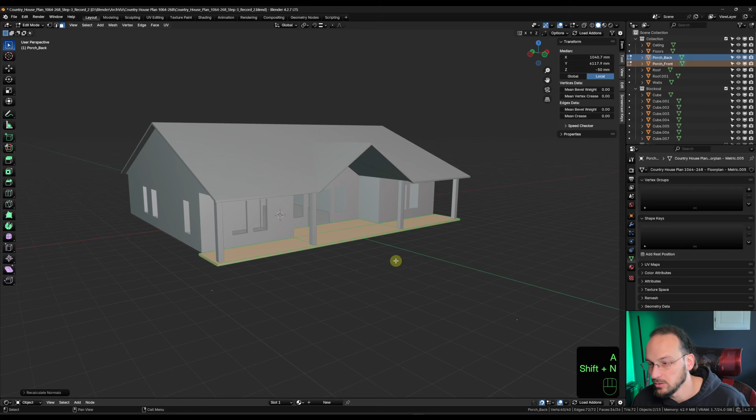And I'm also going to select the walls back in object mode. Vertex select. I'm going to go into left view for that, X-ray mode, select everything on the bottom. And I'm going to snap it onto the porch. So E, snap it to the porch. And that way everything is a little thinner. We have a nice slab on the porches. It'll look a little better.

All right, next I want to get some organization in here. I'm going to call it my collection house, a little sloppy there. I'm going to make a new one in there and call it roof. And I'm going to put my roof parts into that collection. And I'm also going to call this one soffit. So I can close this one and make a new collection in here and call that timber framing.

So I'm going to start on this corner here. I think I'm going to start with all the beams. I'm going to keep it fairly simple. I'm not going to separate beams and stringers and girders and all that stuff. I'm just going to go beams and posts. Keep it a little simpler. So within the timber framing here, I'm going to make one more collection and call it beams.

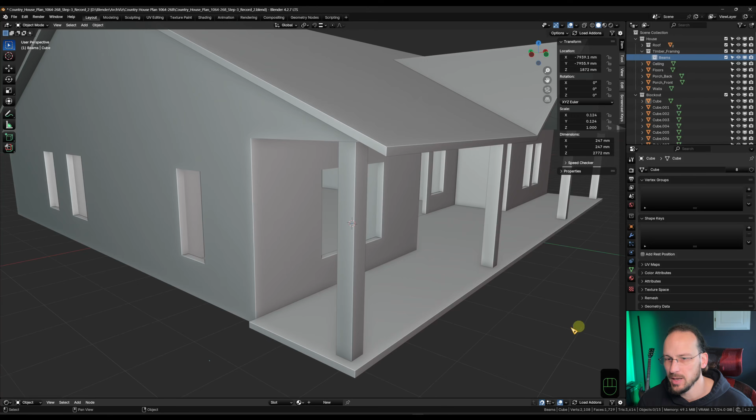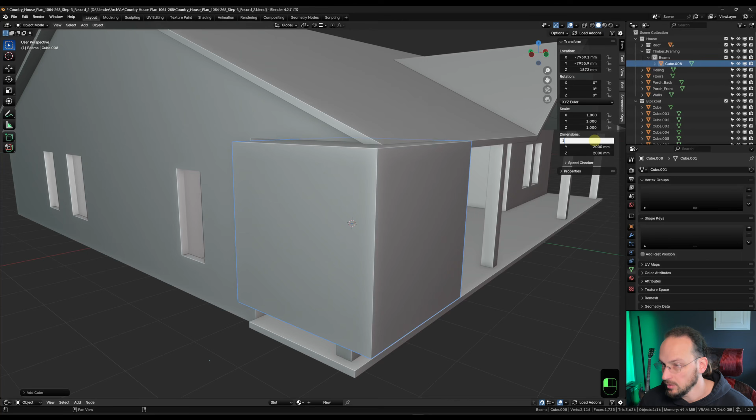And I'm going to bring my cursor to this post here. Shift S, cursor to selected. And now within that beams collection, I'm going to make a new cube. Shift A, mesh, cube. So let's make this one fairly big. It has to be the thickness of the wall. And I want to make it look beefy and nice. It's also got to support the roof and all. So let's make this a 6x12. Which means we go 140 on the X and 292 on the Z.

I'm going to make sure I'm in vertex snapping up here. I'm going to go GB to activate the snap base, grab my corner and snap it to the corner of the house.

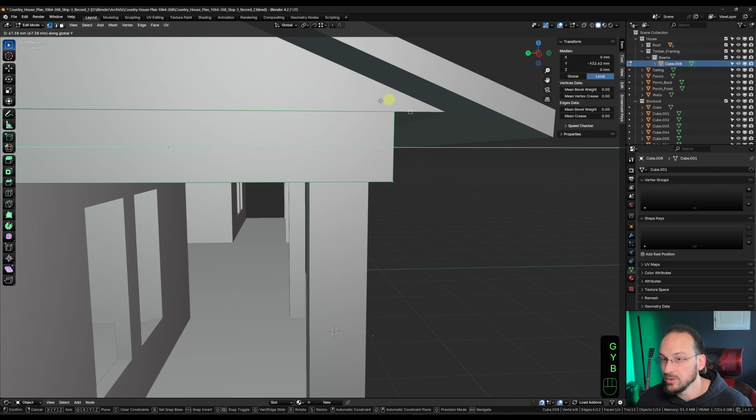All right, so for the connection here, I'm going to go with a mortise and tenon joint with a diminished housing. I'm not going to model the mortise and tenon joint because you won't be able to see it anyway, but I'm going to model the diminished housing. So that means I'm going to grab all my vertices on this front here, and I'm going to bring it back for now. GYB, grab this vertex and snap it to the post.

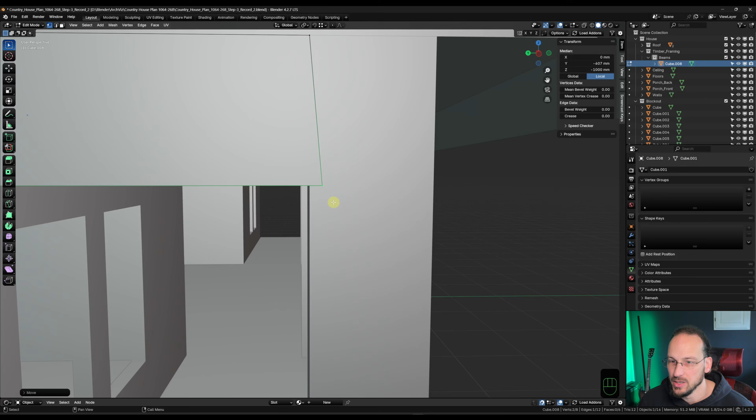And then diminished housing means I'm going to grab my bottom vertices here, GY25 minus. So it sits about an inch on the post. So 25 millimeters or an inch. And then it slopes up to nothing again. So that is called a diminished housing. Now I'm going to deal with the posts later on. I'm going to get all the beams in first because there's going to be a beam here, and everywhere we have a connection. So I'm going to do all the beams first and then adjust the posts to what we get.

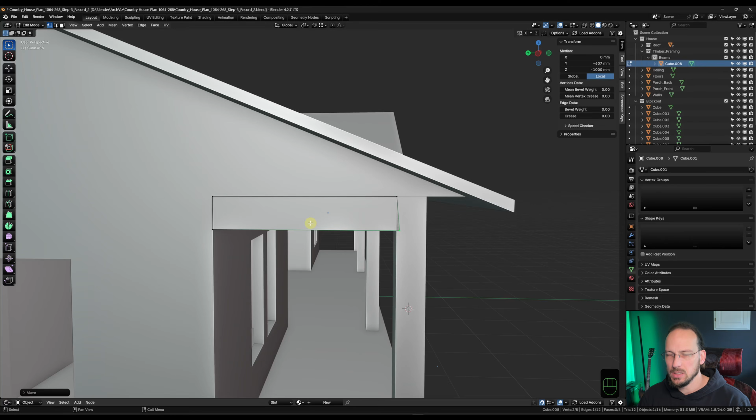Let me turn on cavity here. I'm going to be a little proactive here because there's going to be a lot of reusing assets and copying them around. So I want to prep this properly. I'm going to go into local view. Now, first and foremost, in object mode, yeah, I got to apply my scale. Control A, apply my scale first.

I'm going to go back into edge select. I'm going to select all the edges on both ends and one along the top. Right click, mark seam, A to select everything, U, unwrap. And that way I have a proper UV unwrap on it. Well, mostly proper. Technically there could be one less seam on the ends, but because we're not going to see the ends, I'm not going to worry about it. So we have the UV unwrap on it.

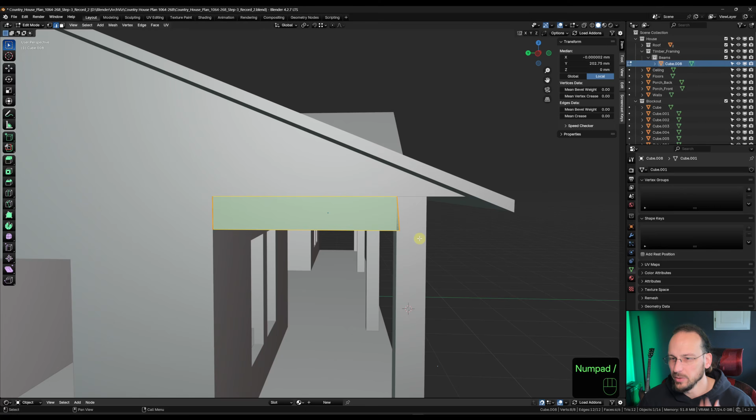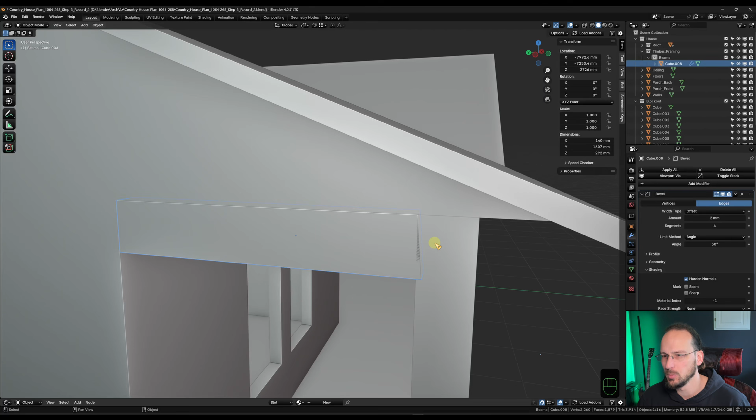I also want to throw the bevel on there already. So I'm going to add a bevel modifier. I'm going to give this 2 millimeters, 4 segments. And I'm going to harden the normals, and that will soften up the segments here a little. Now, for the sake of easier snapping and moving things around, I'm going to deactivate the bevel for now, in object and in edit mode. And then once I've copied everything around and everything is in place, I can reactivate the bevel on everything.

I'm also going to rename this thing, call it beam. And I think I'm just going to go with the axis. So Y in this case.

And that one is already finished. So now I can copy it around, and I need one here on this outside corner here, and they're all going to be the same. So I can make linked duplicates. So I'm going to go Alt D X, snap to this corner, and I'm going to go Alt D X, snap to this outside corner, and Alt D X, snap to this corner. Great. Now these are in place.

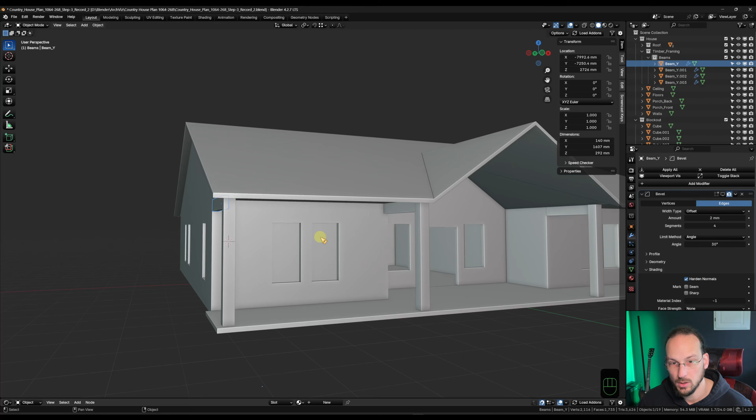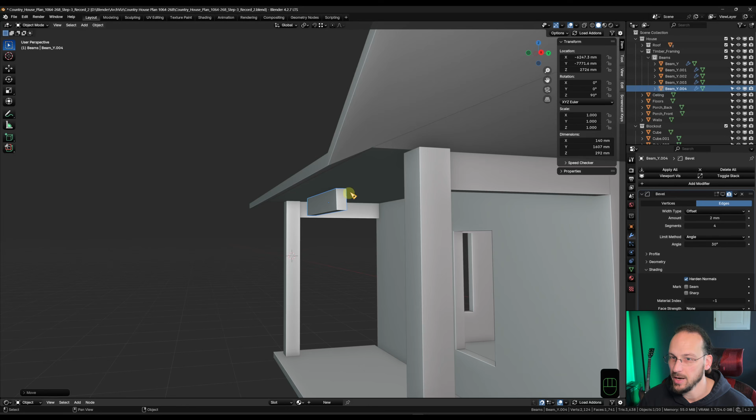I'm going to take my first one again. Now I'm going to go Shift D, exclude the Z-axis, and bring this over here a little. RZ90. And I'm going to snap this on here first. So GB, I'm going to grab, it's behind an object. So GY, bring this back here so I can access that vertex. GB, grab it and snap it to the corner here. That way it's already sitting on that post.

Now in vertex mode, grab this end. And I got to snap it to this post here. GX, snap it to here. And the bottom two vertices, GX 25 minus. Okay, so I'm going to rename that to beam X.

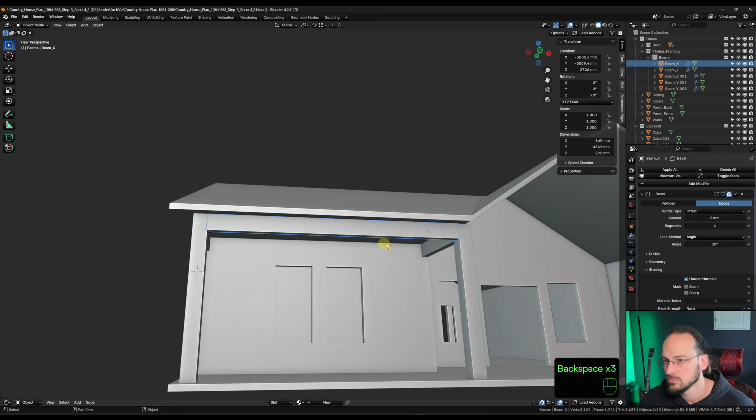And I can copy it over to here, but I think this part of the house is a little longer. So I'm going to go Shift D, X, snap it there, GX 25. So I'm sitting in there already. Yeah, it's a little longer. So I'm just going to grab this GXB with that vertex onto the post. Cool. That's a good step in the right direction.

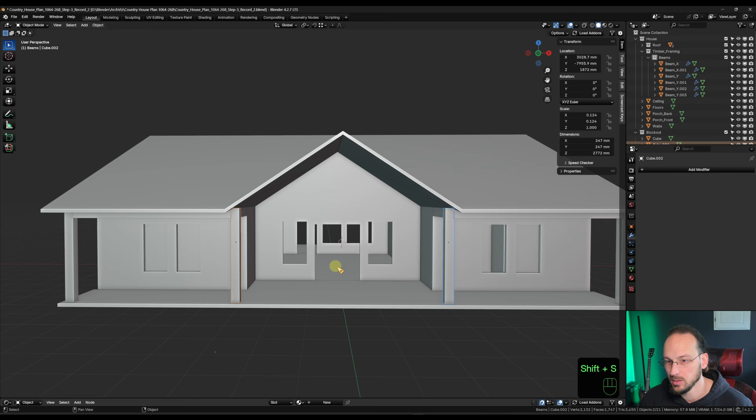So now I want to have a big beam across here. And that one's gonna be a little bigger. So I'm gonna select my two posts here. Shift S, cursor to selected. That brings the cursor right in the middle between these two. I'm gonna go Shift A, add a new cube. And this one's gonna be a 6 by 18. What are we gonna do? Yeah, let's do a 6 by 18.

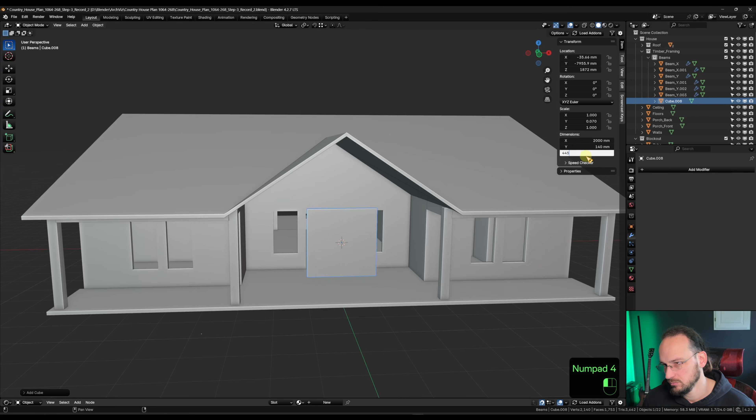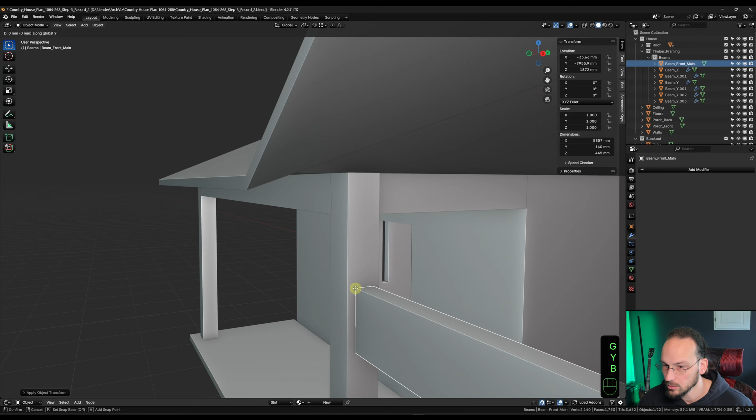So on the Y axis, we go 140. And on the Z, we go 445. I can scale it on the X axis a little, just so it's closer to the posts already. And Control A to apply my scale. Rename it to beam. Let's call it front main. And I'm going to bring it to the front of the beam here, GYB. Grab this corner and snap it there. And then I'm going to bring it up.

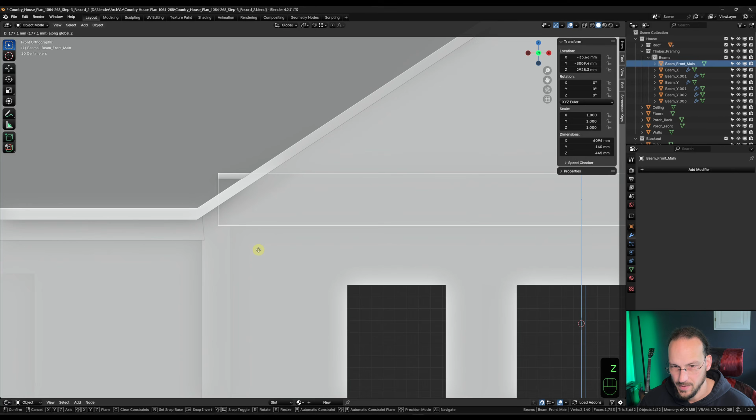So in front view now, I gotta snap it all the way to this little triangle here. So I'm gonna go GX and snap it to that end of the triangle. And the same thing on the other end. GX, snap it to the triangle. Now I gotta position it first. So I wanna have it GZ about half the height of the other beam here. Roughly about that. I can eyeball that. Bring it down a little bit so it sits in the post nicely, and we'll cut it out there later.

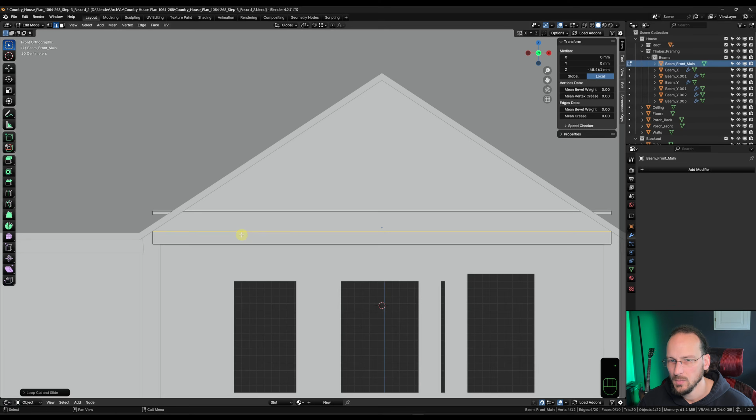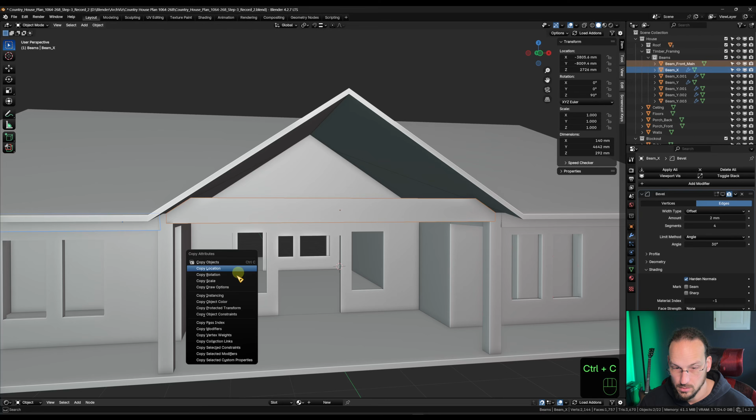Okay, that looks good. Now in edit mode, I'm gonna make an edge loop there, right where the triangle sits. And now in vertex mode, X-ray, I'm gonna select those vertices there and switch over to edge snapping. GG and snap to the inside of the roof. And do the same thing on the inside, on the other side. GG, snap to the inside of the roof. Now I'm also gonna shift select one of the other beams, Control C, and copy the modifier. So the bevel is already there, so I can reactivate that later.

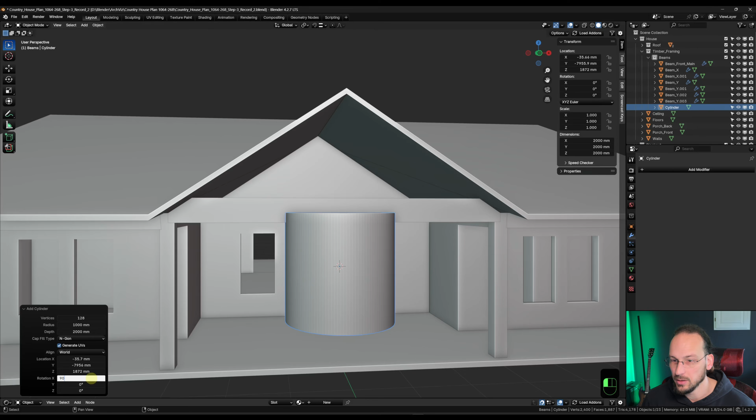And now I wanna have a little bit of a radius cut out in here. So I'm gonna bring my cursor to it. Actually, I can leave the cursor where it is. I'm going to go Shift A, Mesh, Cylinder. I'm going to make this fairly detailed. I'm going to give it 128 vertices so it's nice and smooth. And that way I don't need a subsurface modifier. And I'm going to rotate it on X by 90. And then go in front view.

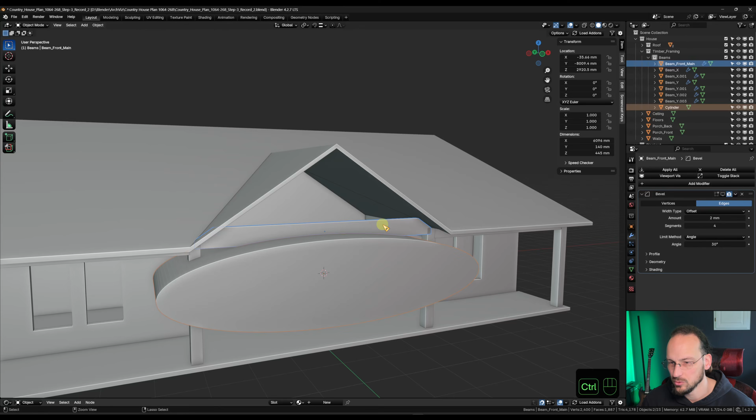I'm going to scale it on X. Do something like that. I'm going to go into wireframe quickly and see where my edge loop is on the beam and make sure they don't overlap. So I'm going to bring this down a little so I have a bit of a separation between them two. And that looks good for now. Shift select the beam, Control minus, Bool Tool will make a nice cut. And then I can deactivate the cylinder from the viewport for now.

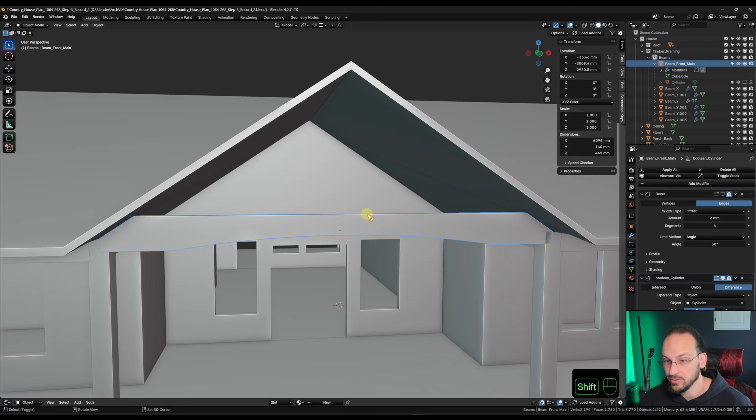I'm going to leave the Boolean active for now because there's going to be some supports later. And I want to make sure that I can adjust the radius if I needed to. But for now, that looks pretty good already. So now I am going to bring my cursor there. Cursor to selected. And that should be lining up with the peak. So let's Shift A, Mesh, Cube. And that one is going to be, let's make it a 2x12. So on X, 292. And on Y, 89.

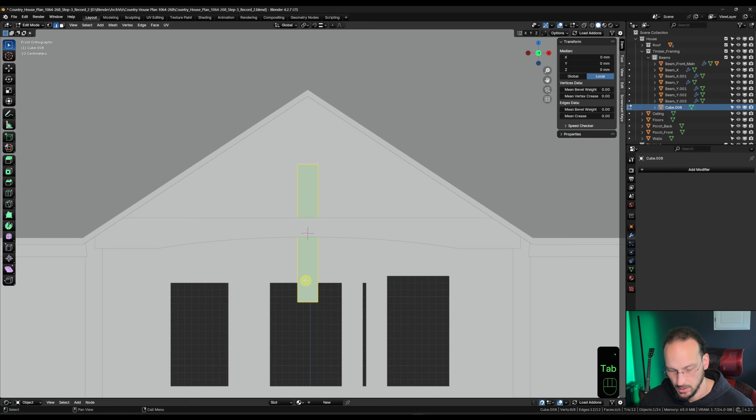Let's go into front view. I'm going to make a loop cut right down the center of this thing and bring it up, GZ. Can do that in wireframe mode. I'm going to go back to vertex snapping for a sec here. And GZB, and snap that to the tip of the peak on the inside.

And then on the bottom one, I'm going to GZ, bring them down a bit. Grab just the outside corners, bring them up a bit. And then the middle one, I'm going to bevel to give it a nice little radius. Yeah, that looks kind of neat.

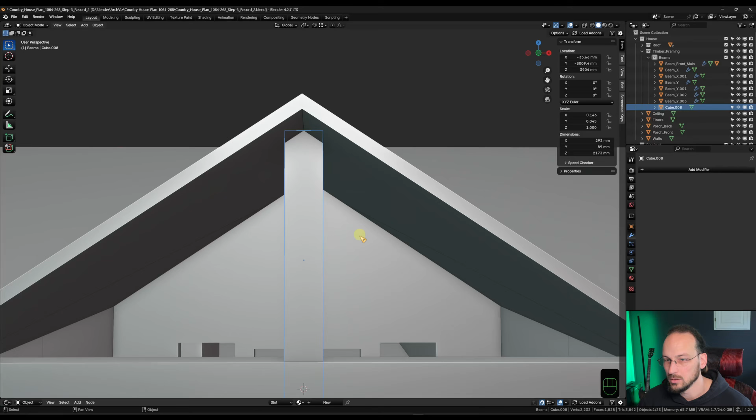So now all I gotta do is go back into wireframe mode, edge snapping, GG, snap those corners to the inside of the roof. I'm gonna Control A, apply my scale. I'm gonna rename it to timber front vertical. And now I want to have two more that go on a diagonal. Doesn't necessarily have to be a 45, just something that looks good.

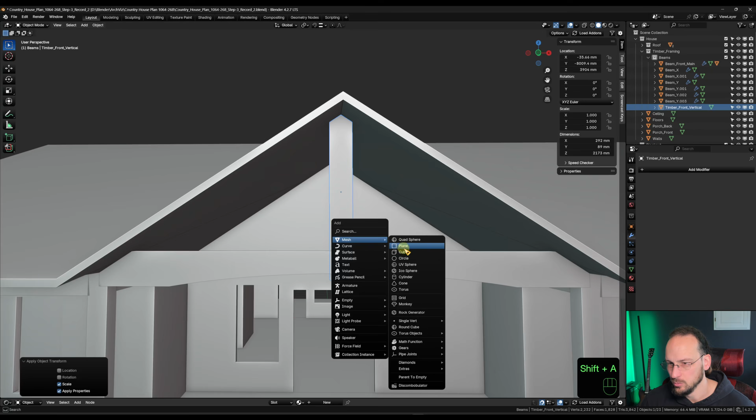So I'm gonna Shift A, add another cube here. And that one, I think I'm gonna make this a 2x10. So let's make a 241. Just a little bit smaller than the main timber that goes vertically. And that way it looks a little more loosened up and a little different.

I'm gonna go into front view. Roughly around the cursor, and I'm gonna switch the pivot point to the 3D cursor and rotate it. Just something like this. This is more decorative than structural, so as long as it looks good, we're happy with it. I'll make another loop cut right down the middle. And then I'm gonna try to line up this vertex with this intersection here. So roughly around there. That looks good.

Oop, maybe I should have done that in object mode so I don't just distort the whole thing. Okay, that looks good. Now I just got to bring the corners to the beam. So select these vertices. I'm still in edge snapping, so GG. Bring them to the beams. GG. There we go. And these ones up top, they go back to the inside. Bring them in a little. GG there. Oh, probably have to do these individually. Make sure I didn't crush it.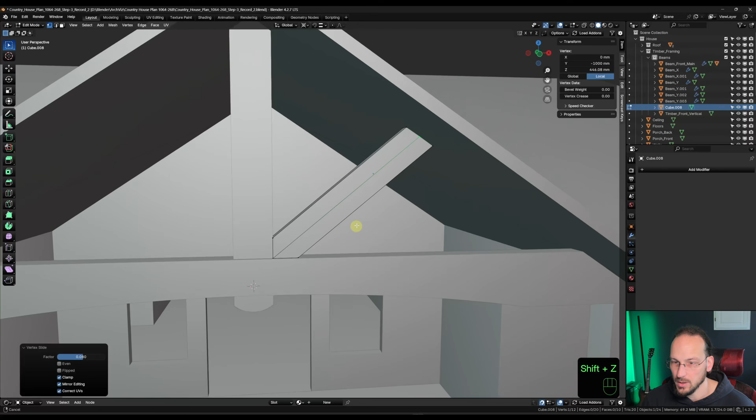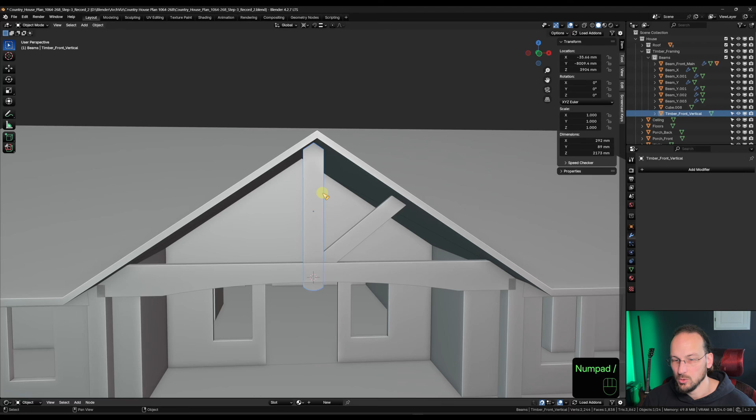Yeah, that looks good. Okay, so again, I'm gonna do some UV unwrapping first on all three of them. I'm gonna select the ends. Nobody's ever gonna see them. And one like that. R, mark seam, A, U, unwrap. Same on the middle one. Alt select these ones down here. One on the back. Mark seam, A, U, unwrap.

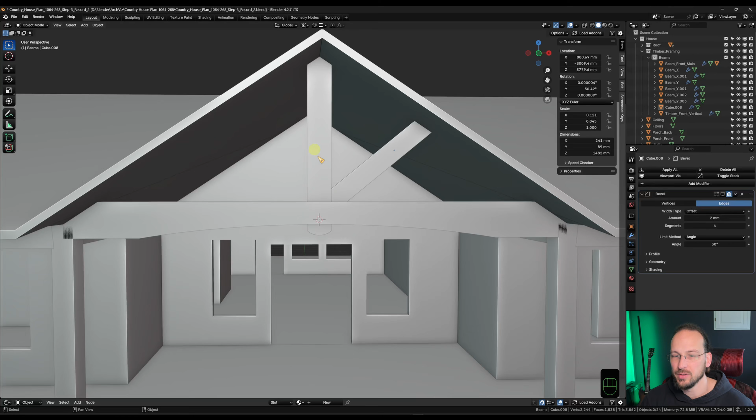And I don't think I've done the main beam on the front yet. Mark seam, A, U, unwrap. I'm also going to do the bevel right away. So I'm going to select this one, shift select this one, select the beam, Control L, copy modifiers. We have the bevel available already. Now I just got to copy this one over to the other side. And the pivot point is still the 3D cursor. So I can select this one, Alt D, cancel the movement, RZ 180. And there we go.

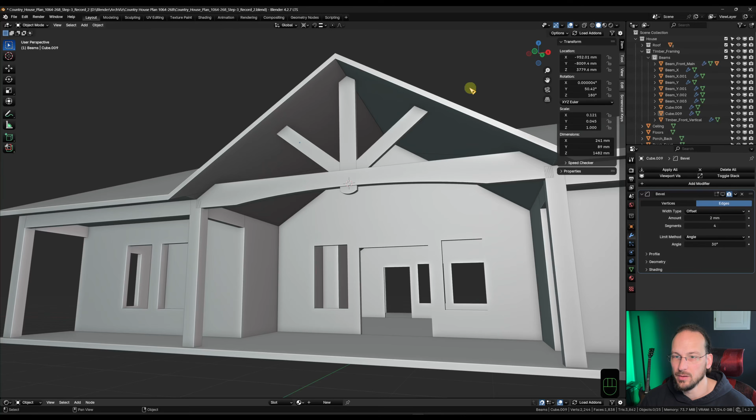That looks good. Now I want to do a little change to the roof and the soffit because I want to have the soffit within the cathedral ceiling here a little thicker. So I'm going to select my roof quickly and I'm going to select these 4 faces on the inside of the beam. P to separate the selection. Back in object mode, select those new faces. Shift select the soffit, Control J.

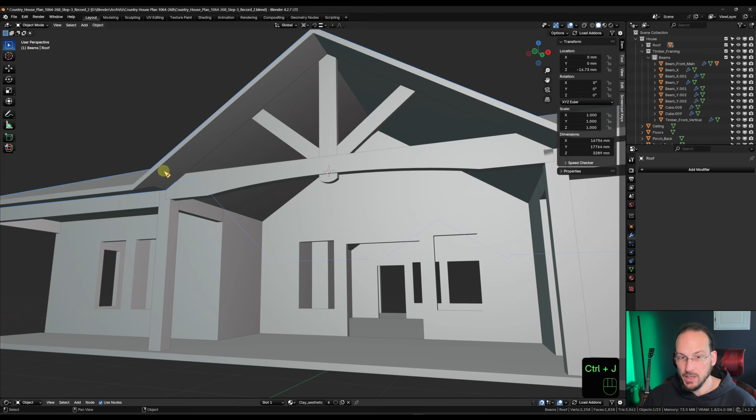And now on the soffit, I'm going to go into face select and select the ones in front of all the beams. P, separate the selection. Back in object mode, select the new faces, shift select the roof and Control J to join those faces back to the roof. So back on my soffit, I'm going to go into local view. Edge select, A to select everything, M to merge by distance, and that'll remove all the vertices we've created here. And I'm going to select the diagonal edges here and Control X to dissolve them. I'm going to make a bunch of loop cuts here.

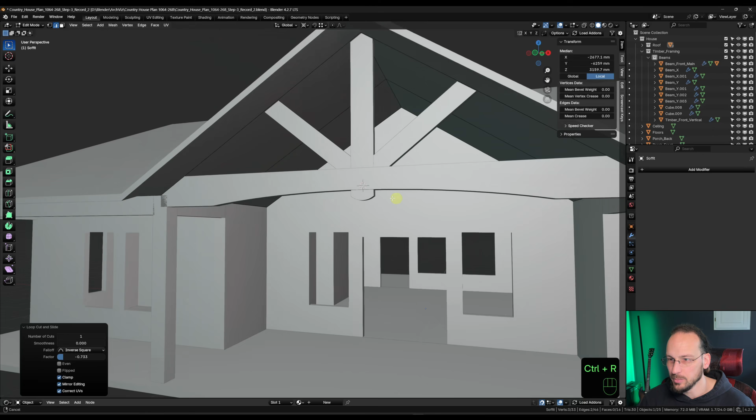Vertex snapping, one on this side, snap it to the top of the beam. Same on the other side, snap to the top of the beam. And then I gotta go in here and make one loop cut on the inside of the beam.

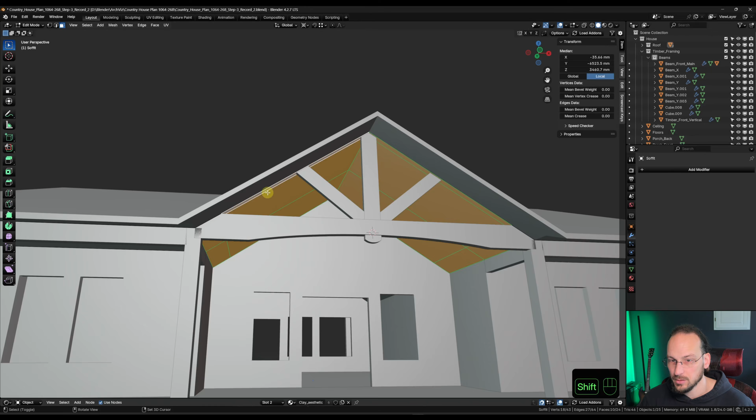All right, so face mode. Select all the faces that we've just basically created with our loop cuts here. And I'm gonna go Alt E, extrude faces along normals, 89. Now I just gotta deal with this little corner here, but as we've done so often now in front view,

vertex. Now let's select these vertices, GG, snap them to the edges just to bring them up and make them horizontal again. Oop. Same on this side, GG. And that way we have a bit of a thicker soffit in there. That looks good. All right, now we can do the posts.

I'm going to start on this one here and start cutting in the diminished housing. So the first thing I got to do is clear the shared data because they're all from the blockouts and they all share the same data and I don't want that anymore. So I'm going to clear that one, make a new collection in the timber framing and call that posts. And then this post goes in that collection and I'm going to rename it to post corner.

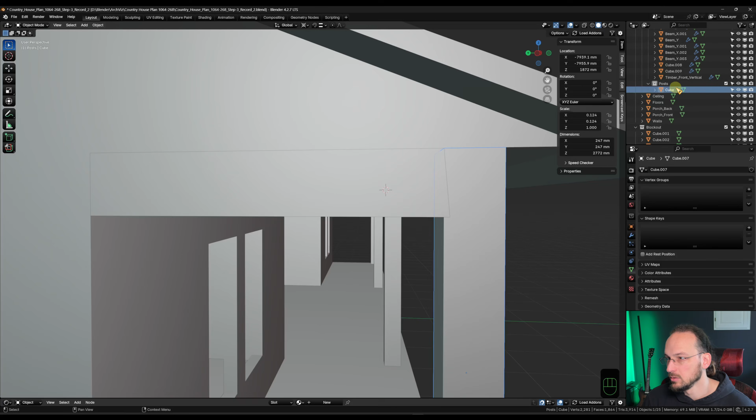All right, so now let's go back to vertex snapping. And first I got to apply my scale here, then go into edit mode and make a bunch of loop cuts here. So I'm going to need a horizontal loop cut snapped to the underside of the beams. Then I'm going to need a vertical one snapped to the diminished housing there. And same to the inside of the beam. And the same thing in the other direction.

And now I can start extruding my faces. I'm going to go back to face mode and select this one here. Alt E to extrude manifold. I'm just going to bring this in a hair. I'm going to select my top edge here and snap it back to the top vertex here. GX snap. And the bottom one, I'm going to bring backwards. GX there. And that way I have my housing in there, and we're gonna get rid of the double vertices in a second.

I'm gonna do the same thing with this face first. Extrude manifold, bring it in just a hair. Edges, this top edge, GY snap on the outside and GY snap on the inside. A to select everything, M merge by distance, and that gets rid of 4 vertices. All right, I'm gonna go into local view now and out of X-ray.

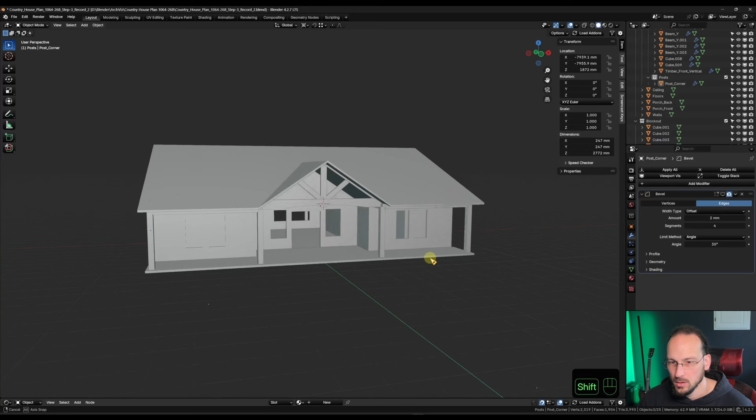And now if I were to go to my modifier section and hold Alt while I click on the modifier section, look at that. That looks nice. That looks really nice. But I'm gonna Alt click again to deactivate the bevel on all of them. So now this one here, I can Alt D X and snap to the outside here on the block out. I'm gonna Alt click and select the block out post, X to delete. And our corner post, Control M, X.

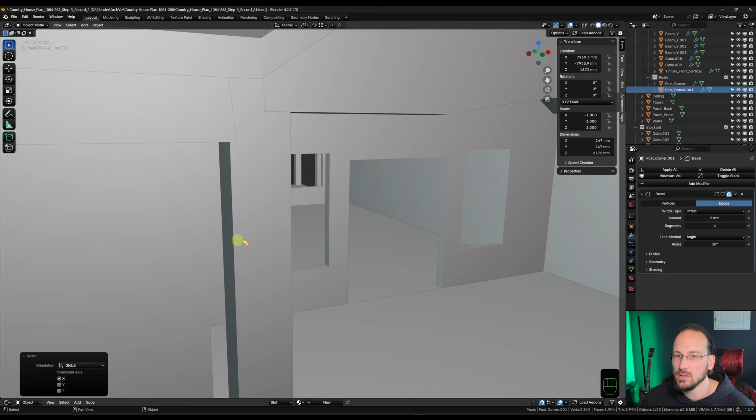Oh, gotta change the pivot point back to medium point. Control M, X, enter. And that mirrors it on the X-axis. And that way it's already in the right position and the right way around. Now these posts here are a little different because we have that pocket here for the main beam. But I'm gonna do the diminished housing pockets first. So I'm gonna bring this into the posts collection, clear the shared data. I'm gonna call this post middle. Now in edge select, Control R.

In case you hear some snoring or slobbery noises, I apologize for that. My dog is sleeping behind me.

Let's go into X-ray mode and do our edge loops again. Go into face mode. I'm just gonna go into local view. That makes it a little easier. Now I have 2 faces here. Alt E extrude manifold. Bring them in a little. Just like this one. Alt E manifold. Bring it in a little. And then go back to edge mode and snap again.

And now I'm gonna make another loop cut here. And this one can just be extruded all the way in, because that's just a beam pocket. So Alt E, extrude manifold, and snap it all the way to the back. A to select everything, M, merge by distance. Yeah, that's a nice post. So gotta UV unwrap it again. So I'm gonna select everything on the top. This is an at times very repetitive workflow, but that's just the way it is sometimes.

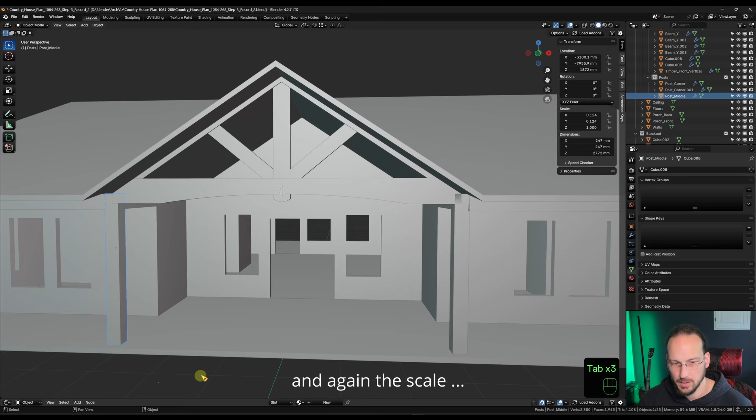Right click, mark seam, Alt U unwrap. I'm going to shift select this post here, Control C, copy the modifiers. And then just like I did before, I can Alt D X, snap this over here, Alt select the blockout post, get rid of it, and then Control M to mirror it on the X-axis. And we're almost done on the front now.

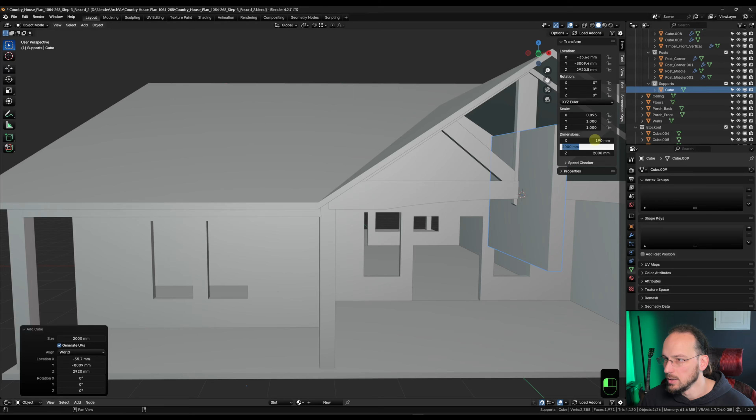I'm going to make another collection in the timber framing and call it supports. And I want to have a bit of a diagonal support up here. So one more time, Shift A mesh cube. And those are just gonna be 2x8s. So I'm gonna do 190 by 89. Make this a lot shorter. And in front view, I'm gonna bring it over here and rotate it by 45 degrees.

Control A to apply the scale, vertex mode, X-ray. Go to edge snapping, GG, and snap them to the posts. Same here, GG, GG. Gotta hold Alt here to go past the origin point. And I can already see I need to adjust the Boolean a little because I want to have a bit of a flat surface here after the support.

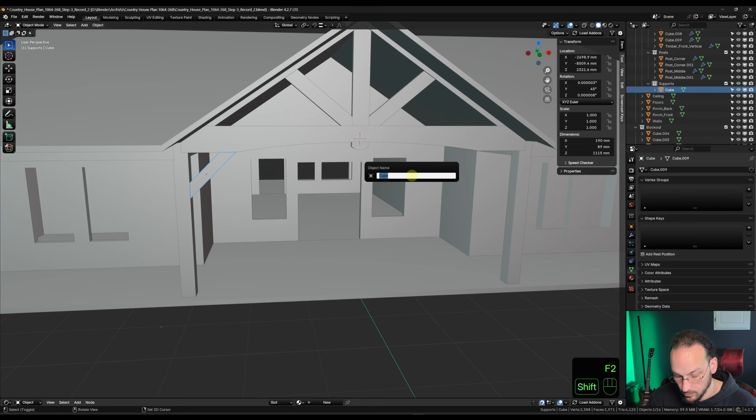Before I do that though, quickly, I'm just gonna unwrap this, select everything there, one on the back, mark the seam, Alt U unwrap. Okay, let's make sure it's nice in position. That looks good. I am going to call this support, let's just call it 45 because it's on a 45-degree angle. And I've got to bring one over here, so I'm going to switch back the pivot point to the 3D cursor. Before that, I'm going to shift select the post, Control C, and copy the bevel modifier onto it.

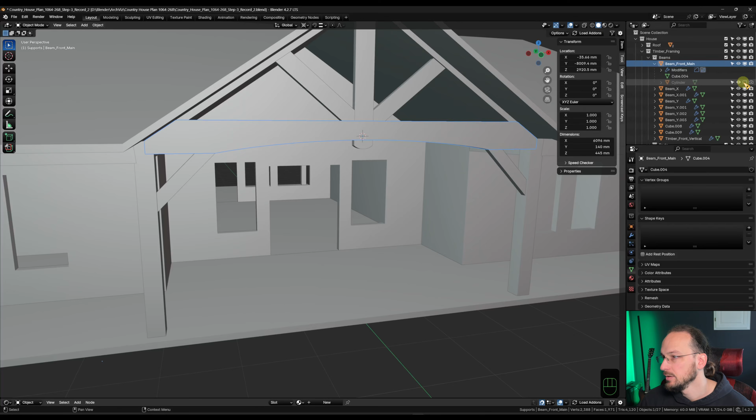And then I can Alt D, cancel the movement, RZ 180. And that brings it over here. So now I got to go back to my main beam here and bring the cylinder back. Back into front view, zoom in a little, and I'm just gonna scale that one on the x-axis in a little. Do something like that, just so I have a nice bit of a flat surface before the radius comes in. And that looks good. Cylinder out of the way again.

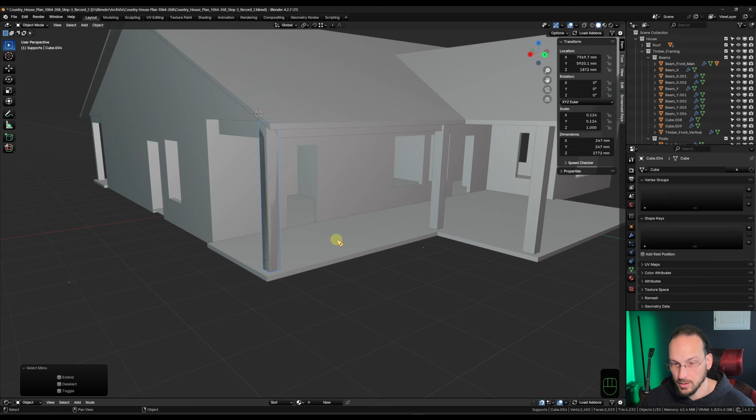So now we need timber framing on the backside of the house too. But that's going to be fairly easy because we're just going to reuse what we have. So for starters, I'm going to select those two beams and that post on the corner. Go to top view. I'm going to Shift D, bring it over here, R180. Switch the pivot point back to median point, RZ180. And I'm going to line it up with the post here. I should go back to vertex snapping for that. Alt select the cube 004, get rid of it, because that was just a block out.

And now I can go to my beams here and adjust them. So I'm going to take this end, GY, snap it to the corner. And here, on this one, this is going to be another special post, and I'm not going to have a diminished housing here. So I'm going to select this beam here. And I'm going to bring these vertices out, so we have a 90-degree angle everywhere again. Select them all, GX, and snap them to the post.

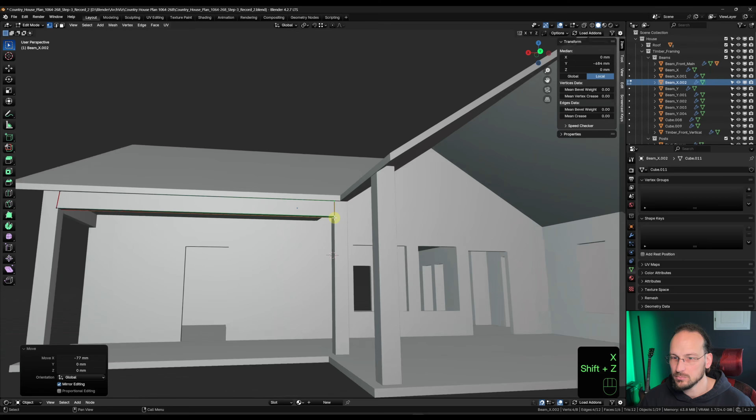And then I can select all these here. And I'm going to go Shift D, B, grab the bottom corner there and snap it to this post. Alt, select the pole cube 008.

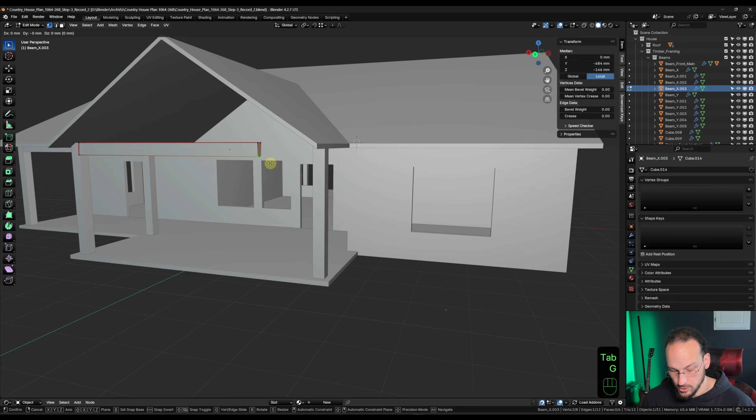Delete it. Now on this end, I gotta bring these out again, GX25 minus. Select them all, GX, grab the top corner and snap it to the post. And on this one here, this one goes all the way into the house, where I have to make a wall opening first. So I'm going to select my wall here, into face mode, X-ray. And I'm stuck in a wall here. I'm going to select all these faces here, right click, bridge faces, and the top and bottom one can go away.

In object mode, I'm going to go back to my beam here, select the whole end and snap it to this wall here. So GY, boom. So that when we're in the house, we see the beam go through. And once we do the inside at some point, we're going to deal with the Z fighting that we have going on right here within that wall. But for now, we can just leave it. That's perfectly fine.

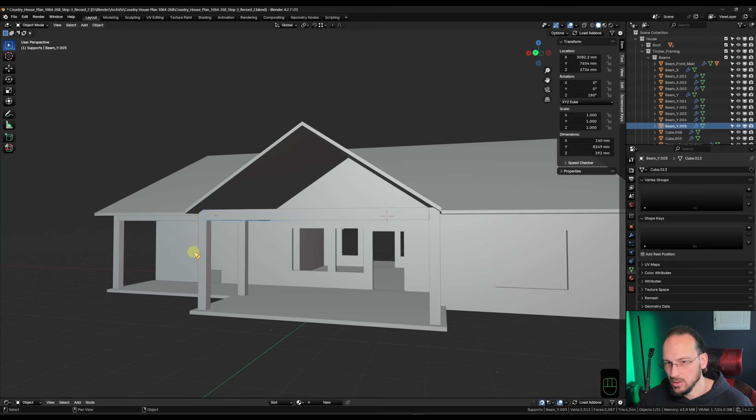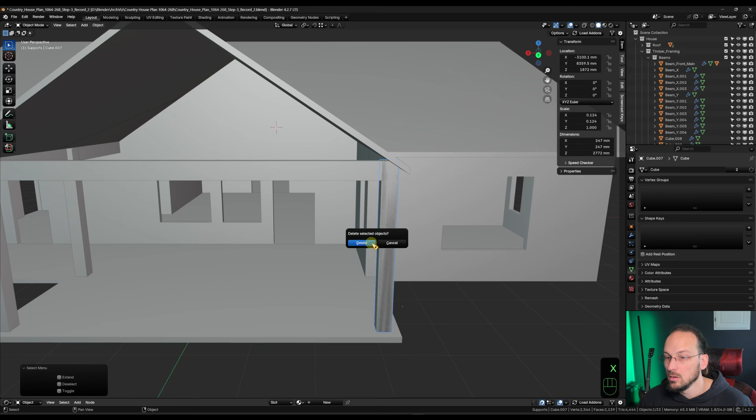Okay, so I need one more post and beam right there. I'm going to shift select these two here. I'm going to go Shift D, B, grab the bottom corner again and snap it to that post. And then I can go Control M, X, enter. GXB, snap it back in place. Alt select, there's James Bond. You just got deleted. And that's already in place. And that's pretty much the backside already.

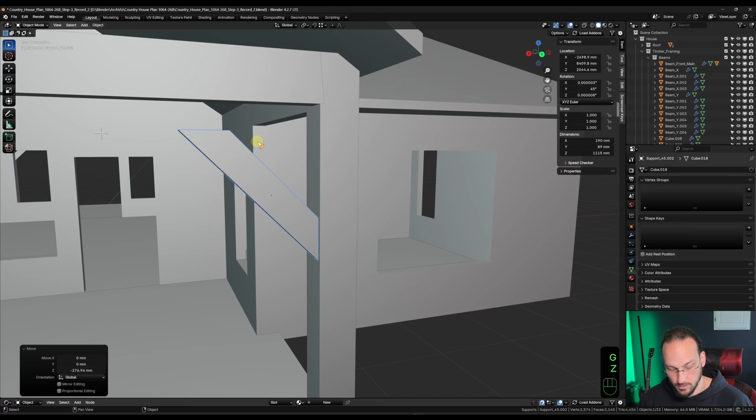Now I just want to have supports everywhere. So I'm going to go back to the front and grab one of the supports. And Shift D, Y. Actually, I could have made a link copy, but that's okay. So I'm just going to line it up, GY, so it's centered under the beam. And GZ, I'm going to bring it down first so I have access to that vertex. GZB, and snap it there. And then I got to Alt D, bring it over there.

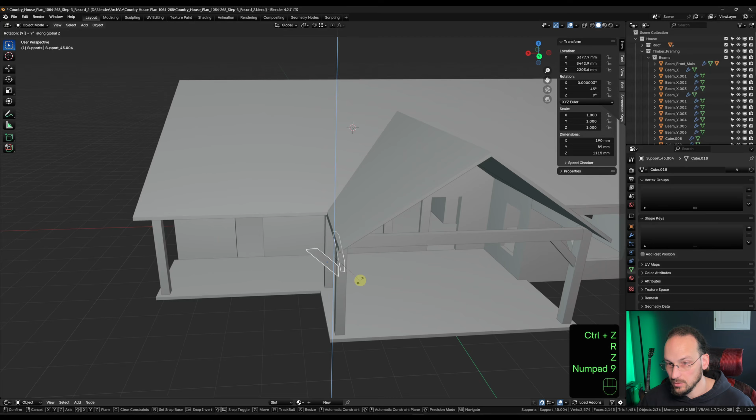RZ90 minus, GYB. And just bring this in place so it sits centered under the beam. Shift select them. Alt D, X, RZ90 minus. And again, this workflow can be very repetitive at times because it's just copying and moving things around, but that's just the way it is.

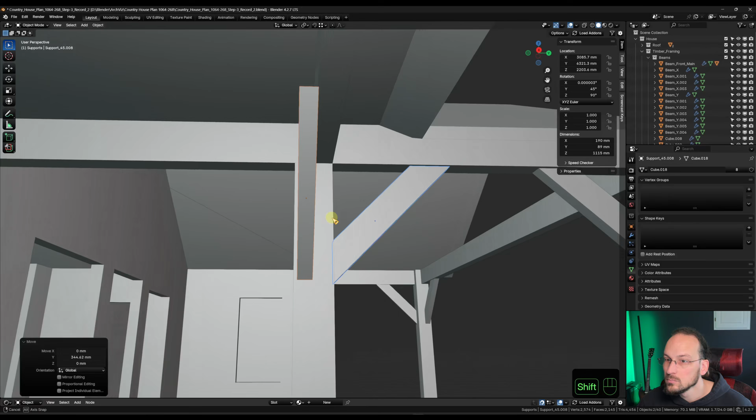All right, so now I just got to make a pocket here on that beam, on this post. So select this post and it's the last one left. I'm just going to go M, house timber framing, put that in posts collection. And I'm going to call this post. We already have middle, so let's call it intersect. Doesn't really matter. Control A to apply the scale. I'm going to go Shift, select this one here. Control C to copy the modifiers.

And then I'm going to Control R, bring a loop cut. And I'm going to need one vertical right there. Go to face mode, Alt E, extrude manifold, and snap it back. And now these beams can sit nicely on that post. Sweet. Quickly UV unwrap it. This one here, mark seam, UV unwrap.

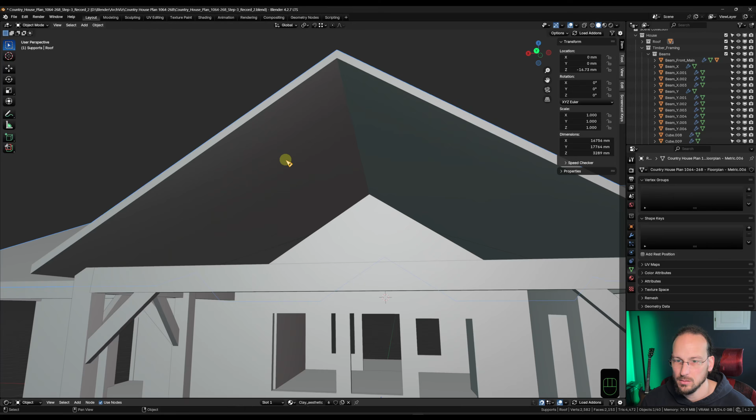Alrighty. So now I want to do the same thing on the soffit that I did on the front. So I'm going to select the roof, go into face mode, select all these inside faces here, P to separate the selection. In object mode, select the new object, select the soffit, Control J. And on the soffit, select this face, and the one behind the beam here. P to separate the selection, select it, Shift select the roof, Control J.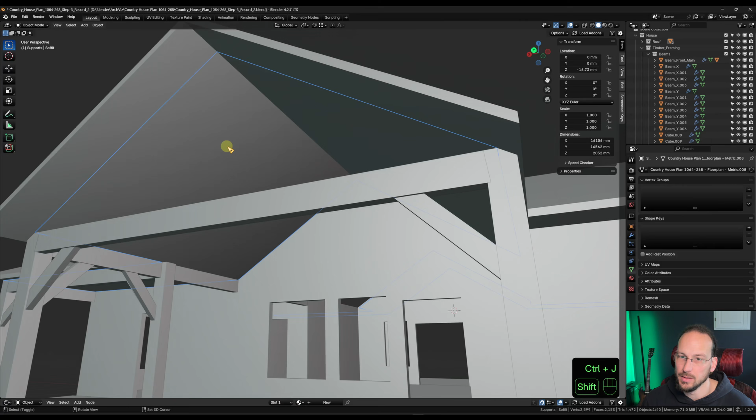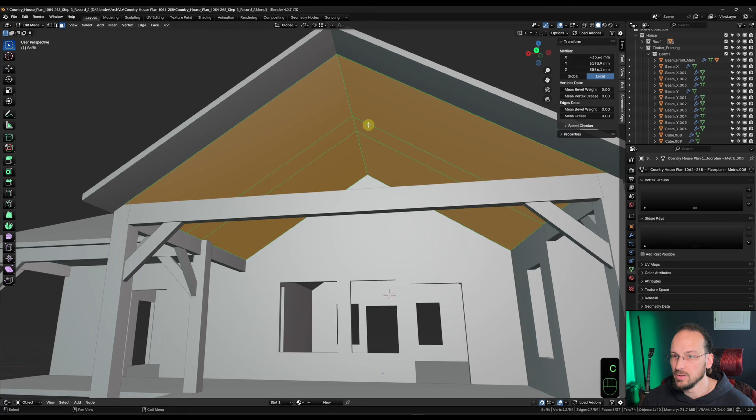And then again, on the soffit, I'm gonna go into local view, vertex, Alt M by distance. I'm gonna dissolve the diagonal edges again. And here I actually don't need to do any loop cutting. So I can just circle select, let's go into face mode, circle select all these faces, Alt E, extrude along normals, 89. And then one more time, hopefully the last time, we can select these and GG, snap them to the top of the beam, GG, snap, and Bob's your uncle.

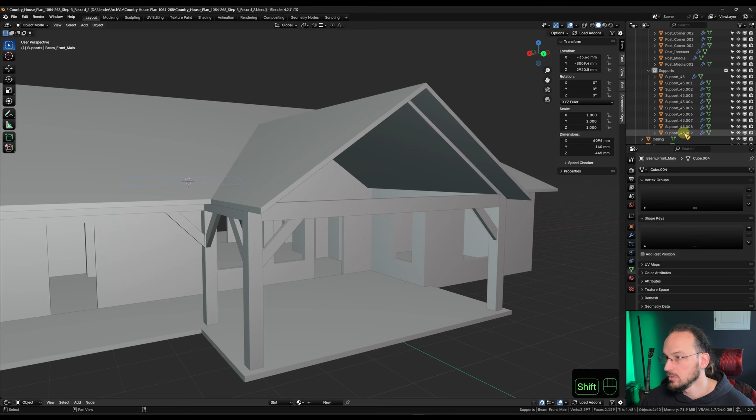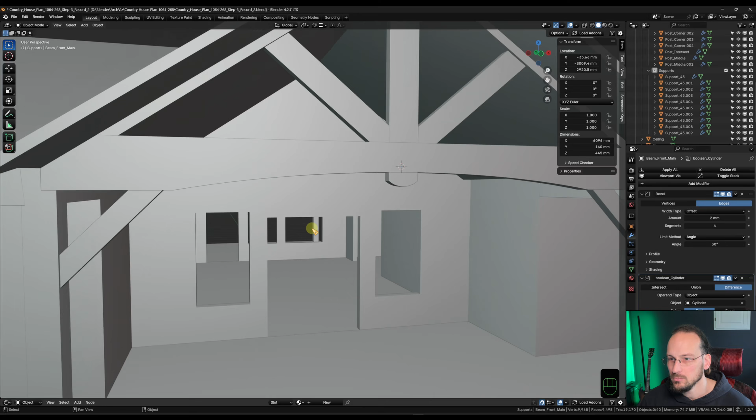Now we can go and select everything, all the beams, all the posts, and all the supports. Go to the modifiers and hold Alt while reactivating them. And that'll reactivate them on all of them. And now that looks really, really nice. Same on the front. We have a little bevel everywhere. We see our diminished housing, the beam pockets.

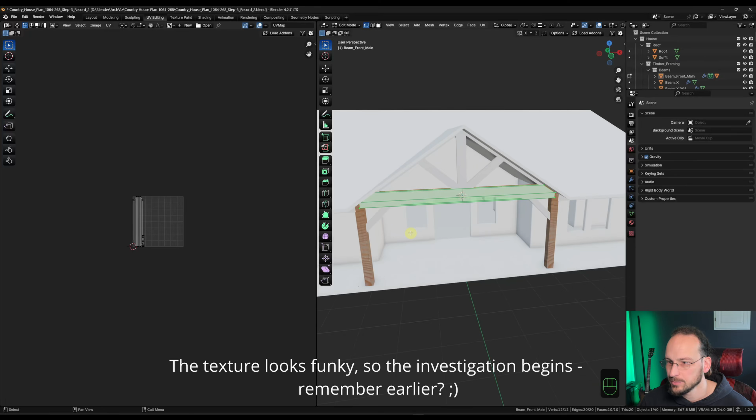So let's just go into render view and just deactivate the scene lights and the scene world, see what it looks like. And I'm just gonna grab some random wood texture that I have in my asset browser here. Yeah, wood 46 should be all right. Check the unwrap. No, that's all unwrapped properly. Don't I have the scale applied? Oh, the scale is not applied on these ones. That's why it looks funky.

But I think I have shared data, so I'm gonna clear the shared data and I'm gonna Control A, apply the scale. Now, was I a bad boy on more of these? Yeah, on those ones too. Control A, apply scale. Control A, apply scale. So now if I go back to my post and UV unwrap that, actually it looks somewhat decent. I gotta adjust the scale of that a little.

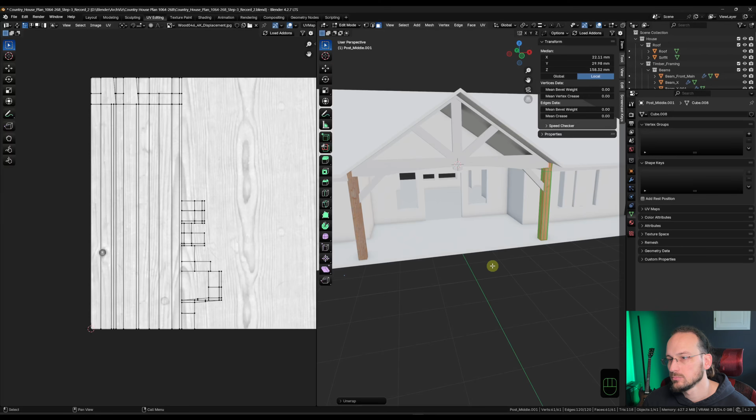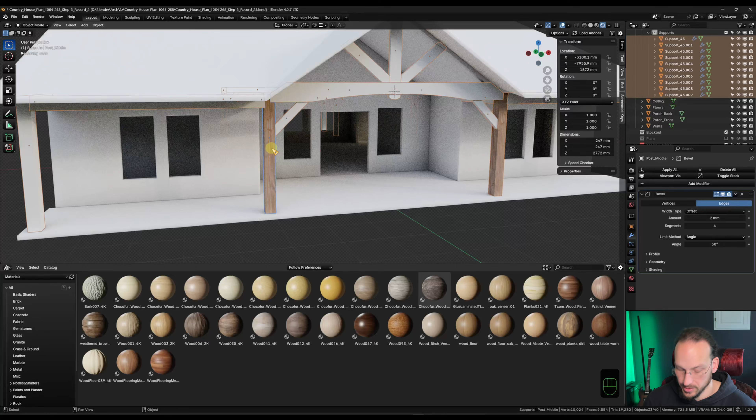It is so easy to forget to apply the scale sometimes. It just happens. Okay, let's go back to the layout. This one actually is inside out too. Alt Shift N. Okay, so let's select everything again. All the beams, all the posts, all the supports. I'm gonna Shift select the one with the material already. Control L and link the materials.

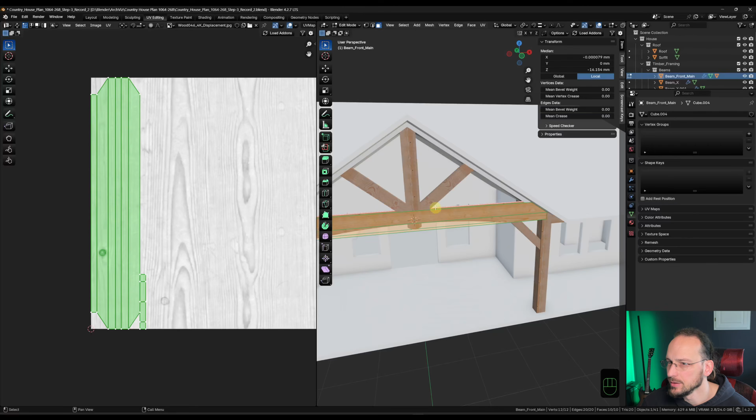Now overall, not too bad. Just gonna adjust a couple here. To start off with, I'm going to adjust the scale on the texture itself a little. Like a 4 or something. That already looks a little better. I'll go back to the UV editor and I want to adjust these ones here. U, unwrap. There we go. Because I cleared the shared data.

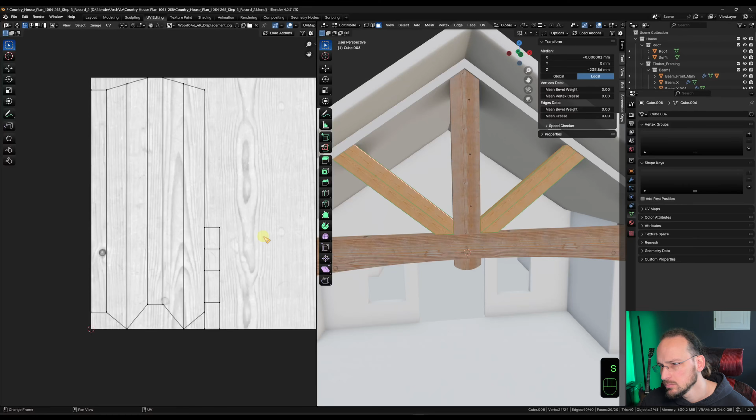What I can do here is I can select this one here, Shift select this one, Control L and copy the UV maps. Mind you, these ones look a little... I don't know if I like that. Let's scale these in a little. Looks a little better. Let's make sure everything looks good on the backside. I'm gonna rotate my HDRI so I can actually see something here. Yeah, that doesn't look too bad.

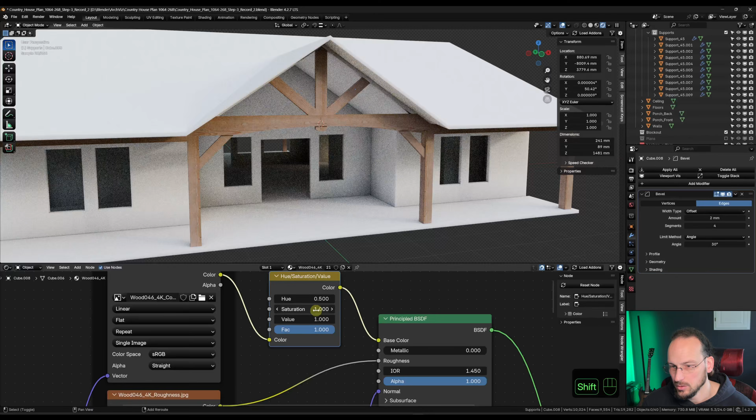The one thing I'm gonna do though is I'm going to throw a Hue Saturation Value into the timber framing and just bring the value way down. I want this dark. And I don't want displacement on there. Let's see what the difference will be. I don't see a difference. I don't need displacement on those ones. I'm gonna bump the bump down to 0.5. I might change the texture later on. Not sure yet if I like this one.

All right, so that looks good for the posts and beams. Now I just want to have the same material on the soffit, especially the ones that I extruded already. So I'm gonna select my soffit here. I'm gonna get rid of the material that's on there right now. And I've got to UV unwrap it first, so I'm going to go into local view on that. I'm going to get rid of all these faces on the backside here that are facing the house, because I will never need those again, and they won't be visible. So X to delete those.

And I'm going to go into edge mode and do some nice UV unwrapping here. On these ones here, I'm just going to go all the way around and one in the middle there, so it'll unwrap nicely. Do I need another? So mark these as seam, then go to the back side. Pretty much all I gotta do here, mark seam, U, unwrap. And go out of local view, Shift select the beam, Control L to link the materials.

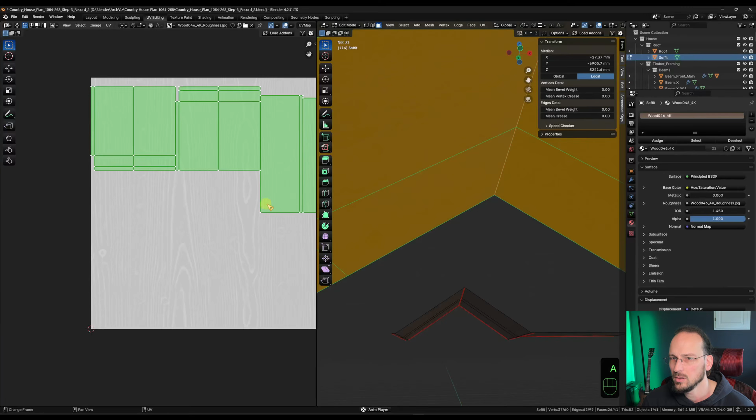And let's just see here. I've got the texture overlay active. That's why you see a little bit here. It's definitely a little big. So I'm gonna go to UV editing, A to select everything, and just scale this up a little. Check on the front here. I'm gonna select these ones first. A to select everything. So hard to see. I'm gonna turn the overlays off. Scale this up a little. Something like that. And then on the back side here, I think these are going the wrong way.

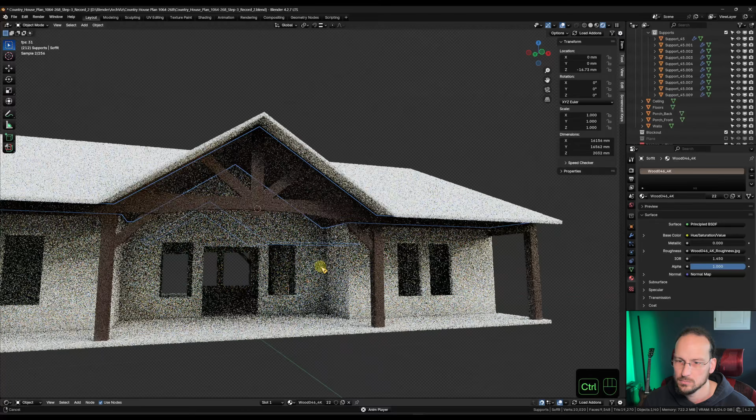Definitely need to be rotated by 90 degrees. And these ones definitely 90 degrees. Almost like I made a seam too many. Oh, I should have made a seam right there. That's why this is a little skewed. So mark that as a seam and just re-unwrap that. U, unwrap. We got these going. Seem to be going the right way. So let's just select these ones here. Those faces are 90. Out of local view and out of the UV editor. And that looks a lot better already.

Now with this video already being fairly long, I'm gonna postpone the windows and doors and all that to the next one. But the timber framing looks good. I'm not sure about the texture yet. I might change that down the line. But for now, this is good to have as a placeholder at least, and then we can always adjust it later. Everything's UV unwrapped properly, so whatever we throw on it should be displayed properly. But overall, I'm happy how this turned out.

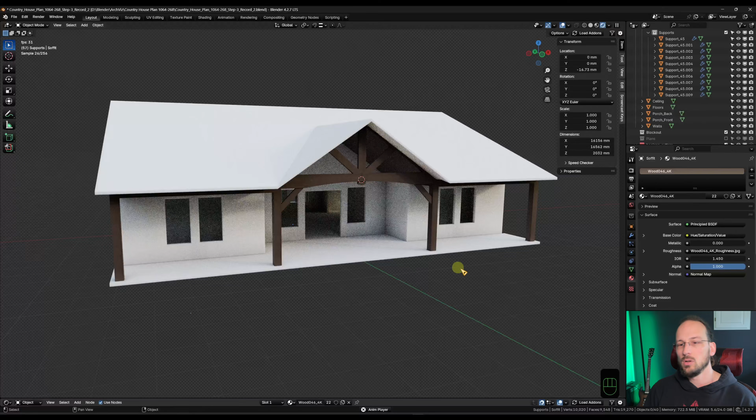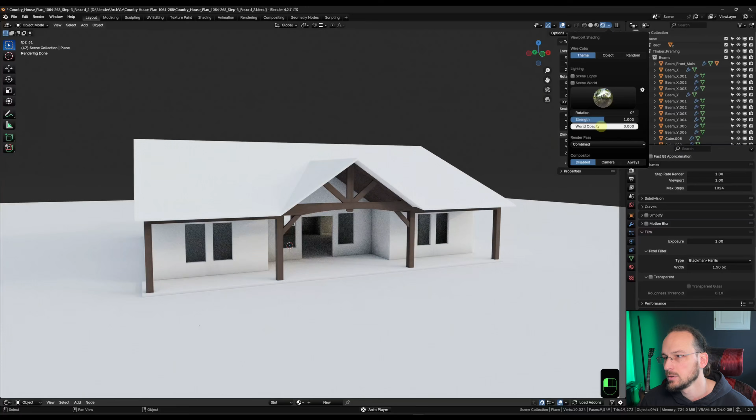One more thing I could do in our scene collection is add a plane, bring that to the origin and just scale it up, just so we have a nice ground plane on there. And now if we go under Film and turn off Transparent, we have a bit of a background. This almost looks like a house. Yeah, with a ground plane and a nice HDRI in the background, it already looks so much better. So the timber framing, I'm happy with it. It looks good. And now it's on to the windows and doors, and we'll tackle that next time.